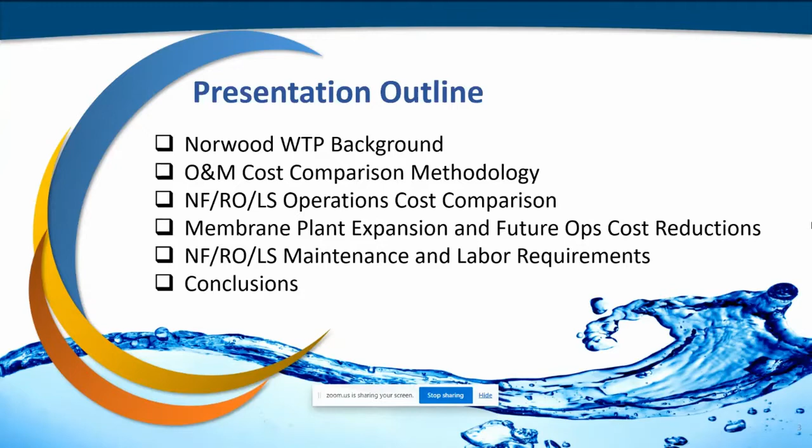Okay, so just a little bit of background on the facility. This is the Norwood Water Treatment Plant facility, located in the southeast region of Florida. It provides potable water for more than 180,000 residents.

It was originally built in 1945 with a capacity of 1.5 MGDs, and this is predominantly the lime side of the plant. Throughout the years, there's been upgrades in the lime side of the plant, as well as doing the membrane buildings, which you see over here.

The recent upgrade that we completed, I think early 2020, was the membrane buildings, both the NF and the RO. So currently the plant has a permitted capacity of 41 MGDs, and this includes the lime softening, nanofiltration, and RO, or low pressure RO.

All treatment processes can run simultaneously with various flows, including the bypass, to meet the average daily demand of 20 to 21 MGDs. So just a quick overview of the 3 treatment processes we have in the plant, which makes this plant very unique since we have all 3.

First, the lime softening system. Water is pumped from our Biscayne aquifer, and then ammonia and sodium hypochlorite is added to start the production of chloramines. It goes into our Dorr-Oliver hydrotreater - we have one that's 10 MGDs, the other one's 5 MGDs, where we raise the pH around 10.2 for softening and precipitation purposes.

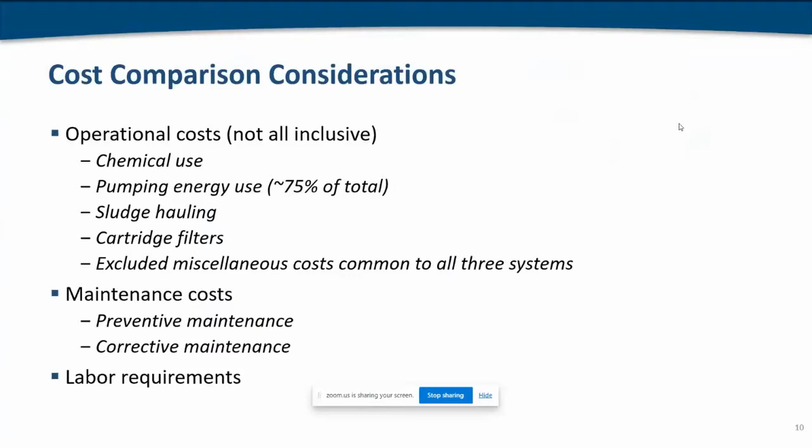So our study consisted of an 8-month evaluation where we adjusted each flow of the treatment units accordingly, and this also depended on the consumption of the permit. We had to have a minimum flow for the RO system, so minimum utilization for the RO system - we couldn't totally shut down one or the other.

So we're going to look now at the results we got, first for the chemical costs. For the monthly chemical budget, we see that our greatest cost is our lime pebble, which encompasses 37% of our total chemical budget. This is because of the large amount of lime we need to use to keep the pH above 10.2.

All of these costs have been normalized by the production flow of the corresponding treatment units. The next highest chemical was sulfuric acid, both for the membrane system, which encompasses 20% of the chemical budget, followed by sodium hydroxide and also the sludge. It's a big cost on our lime side because we're hauling off wet sludge with a lot of liquid in it, which accounts for a large chemical and disposal cost. We found there's an opportunity to optimize and maybe reduce that cost.

So purely looking at chemical costs, once again normalized by flow, we see that the RO is the cheapest treatment in chemical cost, while lime softening is the highest cost per chemical.

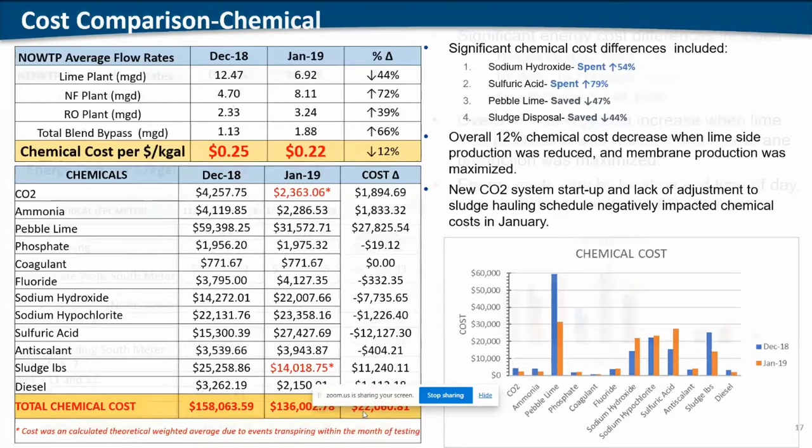So when we look at energy, once again when we adjusted the flows we did see a slight increase in energy costs. Originally it was 22 cents per 1,000 gallons. When we changed the flow, reducing lime side production and increasing membrane production, the cost of energy went up to 23 cents per 1,000 gallons. So we lost around $8,000 that month on energy.

One thing to point out is that the dollar per kilowatt wasn't consistent, it changed with the amount of energy being consumed. That's something we need to evaluate further and maybe adjust for, because it wasn't a set number, and that's just the way FP&L gave us our electricity bill.

So when we do the overall comparison, just looking at chemical and electricity costs, there wasn't that much of a significant change. We decreased by 1 cent per 1,000 gallons, going from 46 cents per 1,000 gallons to 45 cents per 1,000 gallons, so there wasn't any significant cost difference.

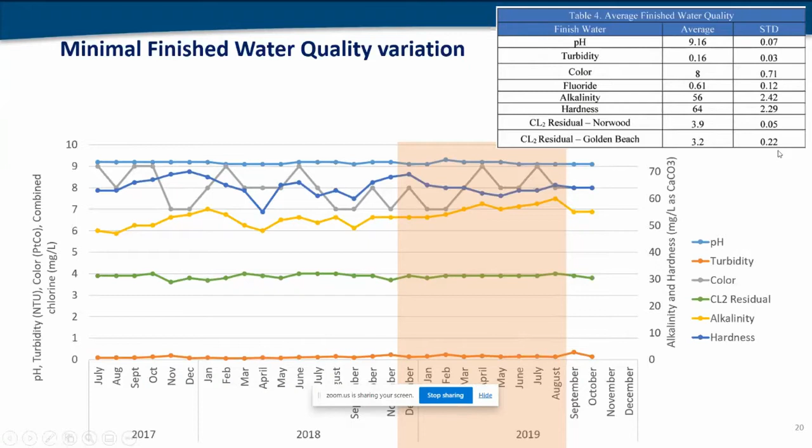Also, when we tracked our finished water, which I guess is good, we didn't see any significant change. The table shows our average water parameters for pH, turbidity, and color, and the standard deviation was within range, so there weren't any outliers.

However, when we take into account maintenance and operation staff utilization, that tells a different story, which is a little harder to quantify as well.

When we look at preventive and corrective maintenance, we know that the lime side is a lot more demanding than the membrane side. However, keep in mind the lime side is a bit older than the membrane system. Nonetheless, there's a lot of wear and tear with the lime side, just because your slakers can clog up, and even your sludge piping will eventually clog up, so you have to change the piping.

There's a lot of pumps that are failing, or a lot of maintenance that needs to be done on the pump, such as oil changes and cleaning out the tanks every 6 months. So in terms of preventative and corrective maintenance, the lime side had a lot more cost related to that.

When we look at personnel utilization, once again, the lime side is very heavy. You need a lot of people to operate the lime side compared to the membrane side. For the membrane side, both NF and RO, you can basically have 2 people - 1 operator at the main control room monitoring the SCADA and entrance of the plant, and the other person going down and taking skid parameters every 4 hours - conductivity, pH, pressure, and flow readings.

So this is for the NF side. For the NF, we upgraded all of our skids. We changed them from a 3 MGD to 3.5 MGD, as well as adding an additional new skid, as you can see here. Also, we put in a new scale inhibitor addition and new feed pumps.

For the RO, we upgraded the skids from a 2 MGD to a 3 MGD. Once again, the recovery rate also increased from 75 to 80%, as well as we upgraded our ERDs.

With these new improvements, we are expected to reduce our energy as well as chemical costs. We're looking at a pilot scale to see if we could safely reduce the sulfuric acid used in our membranes, as well as our NF. So we would like to continue this research and work to see how we can further optimize the membrane side of the plant.

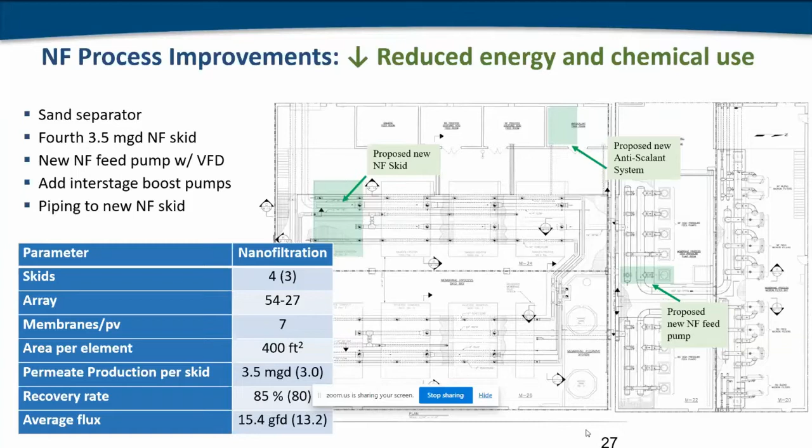So, conclusion. Overall, when we looked at both chemical and electrical costs, we saw that the NF, surprisingly - I thought it was going to be the lime side - but surprisingly, the NF is the cheapest technology right now. Close though, our lime side is pretty close by.

For the nanofiltration, we calculated it would be 40 cents per 1,000 gallons. For the lime softening, it would be 41 cents per 1,000 gallons. And for the RO, which is still costly, it would be 47 cents per 1,000 gallons. The RO is the one that has a lot of expensive energy use.

That's because of the high pressures that you have. Your wells are a lot bigger, a lot deeper. I know for your RO side, it's 200 psi compared to your NF, which is 110 psi. So you have a lot more energy being consumed.

However, like I said, your chemical cost is greatly reduced when you increase the membrane operation. And this is not taking into account the personnel and the maintenance, corrective and preventive.

So our recommendation for the plant is let's maximize the NF production to around 10.5, and continue to minimize the lime side to less than 10 MGD.

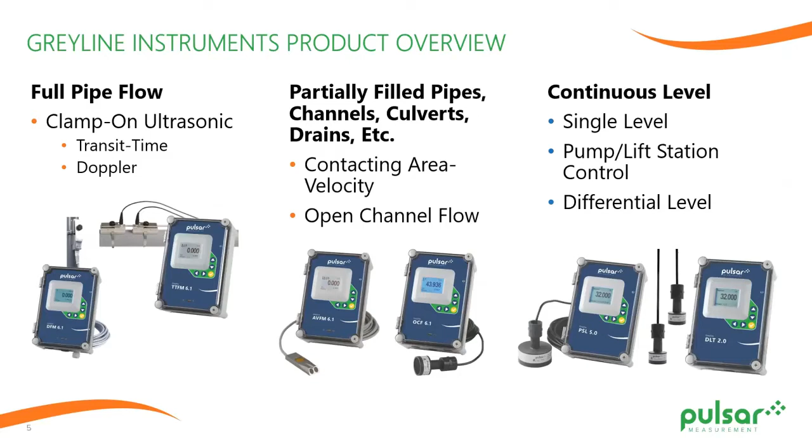Here's a general lineup of what we offer, from the legacy Greyline side of Pulsar Measurement. Today we're just going to focus on these clamp-on ultrasonics, the transit time and Doppler flow meters you see on the left.

So we're going to jump right in with our TTFM 6.1 transit time flow meter. Some of you may be familiar with transit time already from other companies, but the basic way these operate is we have 2 transducers that clamp onto the outside of the pipe. What they're doing is sending an ultrasonic signal back and forth to each other. In this diagram on the bottom right, you can see transducer A is sending a signal across the diameter of the pipe, bouncing off the pipe wall, and transducer B is measuring or receiving that transmission. Then transducer B does the same thing in the opposite direction.

If that pipe is completely full and there's no flow in it, those signals take the same amount of time either direction to arrive at the opposite transducer. But as soon as we introduce flow into the system, the signal moving with the flow arrives faster than the signal going against the flow. So this unit is measuring the difference in that transit time, and that transit time difference is directly proportional to the fluid velocity. That's the basic background of how we're making this measurement with the TTFM 6.1.

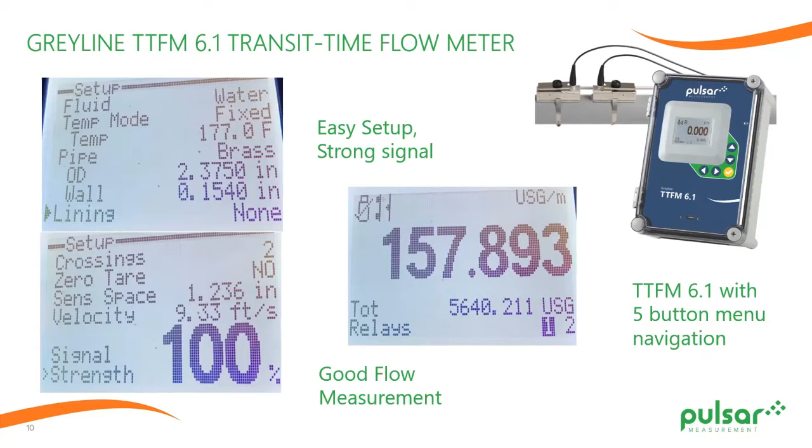I mentioned that we have a wide range of pipe diameters, and we accomplish that by using different transducers. Our TTFM 6.1 traditionally only had these standard B sensors, seen in the upper right-hand corner, spec'd for 2 inches up to 48 inches. We'll see in the next slide that we expanded our transducer offering because of different mounting methods we have.

One area we were missing was pipes under 2 inches. So last year we released our small pipe, or A sensors, capable of measuring on pipes from 1/2 inch to 4 inch diameter. We typically recommend them for 1/2 inch to 1.5 inch pipe diameters. Just recently, at the beginning of this year, we released our large pipe, or C transducers, good for 12 inches up to 48 inches.

You may be wondering, we already have B sensors good up to 48 inches - why do we have another set of sensors also good up to 48 inches? I'll get into that in the next slide.

We have a few different transducer configurations. The default mounting method is this V mounting, or 2-cross. This is what you've seen depicted in all the TTFM 6.1 pictures so far, where both transducers are on the same side of the pipe. The signal goes across the diameter of the pipe, bounces off the pipe wall, and then reflects up to the other transducer.

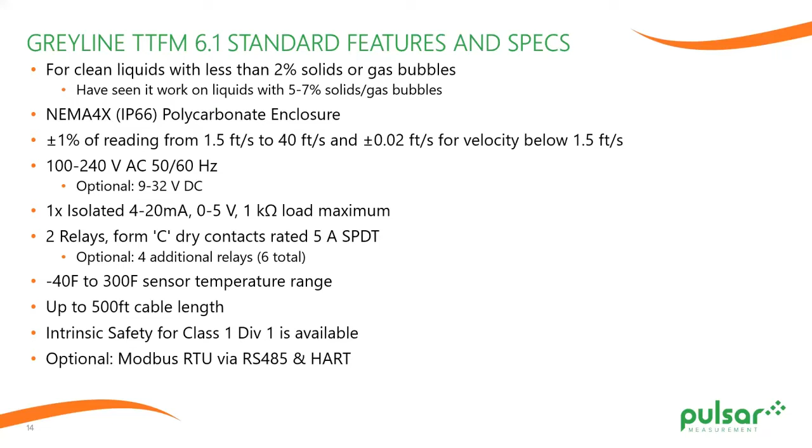Standard power is 100 to 240 volt AC. You can get it optionally as 9 to 32 volt DC if you have a remote application and want to hook up a battery and solar panel system. It has a standard 4 to 20 output, which can be converted to 0 to 5 volt output. It has 2 control relays, which can be programmed for high flow or low flow alarms, or pulse output, and we can also add an additional 4 relays to give you 6 total. We can run up to 500 feet of cable length between the transducers and the display. We have class 1 div 1 intrinsic safety available, and we also have Modbus and HART available for serial communications.

Just to show you a little bit of difference between the portable PTFM 1.0 and the TTFM 6.1: the portable unit has a built-in rechargeable battery. It can operate continuously when plugged into a charger. The data logger is only 300,000 points on the portable. It's only compatible with the B sensors right now, which are 2 inches to 48 inches. You don't have any control relays, but you do have a 4 to 20 milliamp output on the portable.

We are in the process of updating the portable to the 6.1 generation, and we're actually looking to release that new portable in April. So it'll become the PTFM 6.1. What you'll see is it'll be compatible with the A, B, and C transducers. It's going to get a larger data logger. Right now our portable unit, the handheld portion, does not have any IP rating on it, but we're going to go to, I believe, either IP66 or IP67 on the control unit on the handheld portion with the 6.1 generation. So it's going to be a more robust unit and have more of the features of the TTFM.

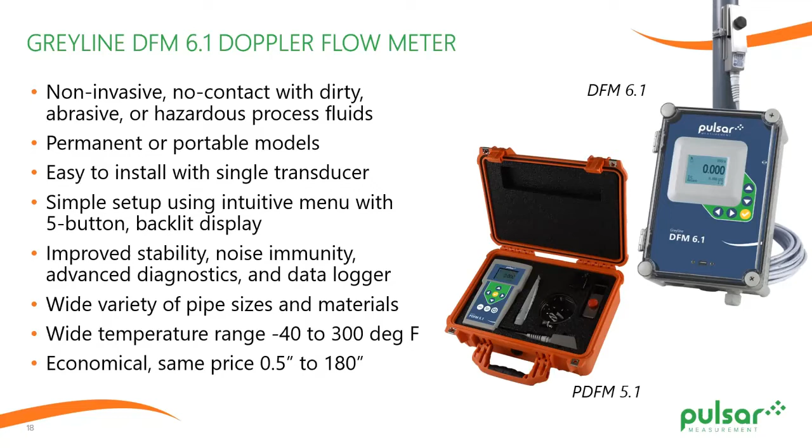Standard features and specs look pretty similar to the transit time, it's just the percent solids range. Remember, with the TTFM, we're spec'd at 2% solids or less. For the Doppler, we're spec'd at 2% solids or more.

There is overlap between the two units. I've seen the transit time work on fluids up to 5 to 7% solids, so there are areas and applications where you can get both the DFM and TTFM to work. Sometimes it's just a matter of testing the unit out at the application to see how it performs.

But for the most part, you're looking at dirty fluids with suspended solids, aeration, sludges, slurries for the Doppler. This is a plus or minus 2% of reading unit, as opposed to the transit time, which is plus or minus 1%. But you still get the 4 to 20 output, 2 relays, optional additional 4, 500-foot cable length, class 1 div 1.

And optional Modbus or HART serial communications. Again, with the portable, you get the same battery life as the portable transit time unit, but it uses that single transducer for 1/2 inch to 180 inch, same data logger and no relay, but you do get a 4 to 20 there.

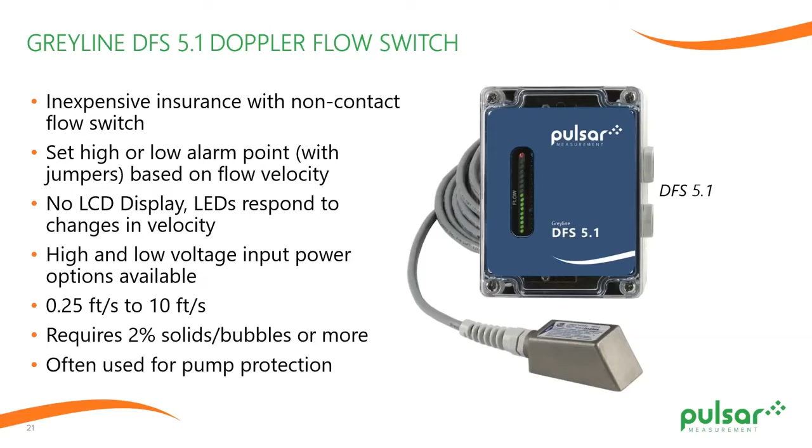Once the flow gets above or below that set point for however long your delay is set for, there's a simple control relay that sends a signal out. So you can either use that as an alarm to a SCADA system, or use it to cut the power to a pump so you don't run it dry, whatever. For under $1,000, you have a very reliable pump protection unit with our Doppler flow switch.

Just to touch on some typical applications for these units: with the transit time, we're typically looking at raw water - lake, stream, river, etc. - cooling water, chemicals, low conductivity water, water and glycol solutions, diesel and fuel oils, treated water, and domestic water. For DFM, we're looking at raw sewage, combined sewers, municipal influent, viscous fluids, return activated sludge, slurries, pulp stock. So you can see the different territories they cover, but again there can be some overlap between the two depending on the application.

And just to bring it home, like I said, I like to start and end with this slide. We really push Pulsar measurement because we're easy to install, set up, and use. We have reliable performance from design to manufacturing and operation at the site, management of information with our standard data logger and free software. We're economical, both the transit time and Doppler - it doesn't matter if you're measuring a 1/2 inch diameter pipe or a 48 inch diameter pipe, there's virtually no difference in the price of the unit.

That's a great way to compete against inline mag meters or insertion mag meters or anything like that. We get that economy, especially when we get into larger diameter pipes. We're very responsive, whether it's coming from us at Pulsar Measurement or our rep partner, Jack Tyler. We typically get everything shipped out in 3 to 5 business days, and again our standard 2-year warranty on all of our products.

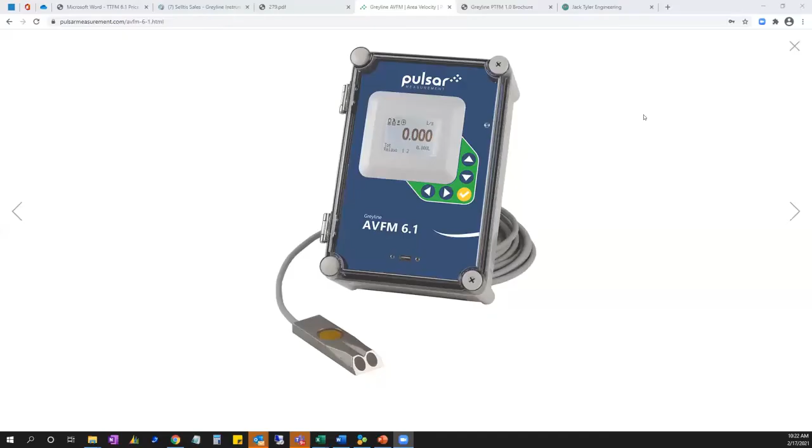All right, can you guys see that now? I cannot see it. Oh, sorry, I guess I'm not sure. Share. There, how's that? So can you guys see that now?

Yeah, okay. So this is our AVFM 6.1. This uses this submersible transducer here. You can see there's a crystal in the top of the unit and 2 crystals in the front. The one on the top is going to measure the level of the fluid, and the one in the front is going to measure the velocity of the fluid.

So like I said, this is used for partially full pipes, open channels. You can use it in the effluent leaving a wastewater treatment plant. You can use it for water coming in through the sewer lines into lift stations. So we're measuring the level of the fluid and the velocity of the fluid in the unit itself. You're just programming in what the channel dimension is, whether you're using a circular pipe, a rectangular channel, or trapezoidal.

We do have the ability to build custom channels inside the unit, and it uses that information along with the measured velocity and level to give you a volumetric flow rate without having to have a flume or a weir.

This is the permanent version, so a wall-mounted unit. We do have a portable unit of this, it's called the Manta Ray, and it looks kind of similar to the PDFM and PTFM, where it's in that nice orange Pelican case, but it's actually a unit that's built into the Pelican case. It has all the same features as the AVFM, just built into a waterproof case with a rechargeable battery, but uses the same transducer.

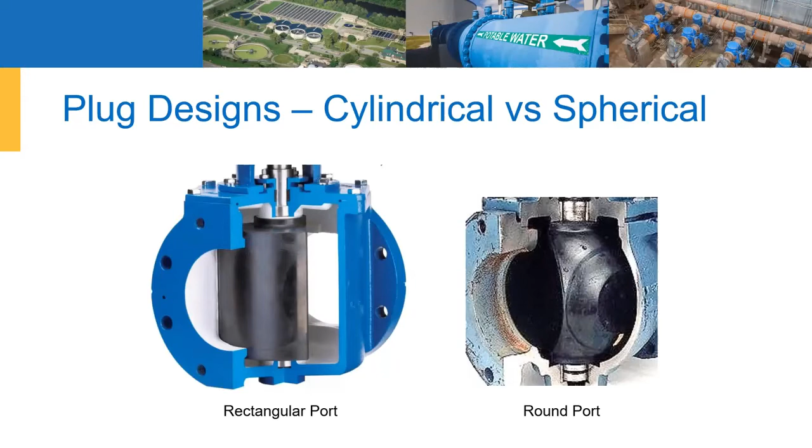Port area options. So for decades, standard port existed. When Matt DeZurik invented the eccentric plug valve, he needed it to fit in the same space as a gate valve. And so he found out that he could get everything he wanted accomplished and fit in the same space if the port was 80% of full pipe. Remember, they didn't have high flow velocities, a lot of abrasives, a lot of solids. Energy costs weren't so important. So that is what he came out with, and that's still the most popular port design. It's 80% or more for 20-inch and smaller valves, and 70% or more for larger sizes. And that's anybody who makes a rectangular ported valve. Those are the dimensions that we follow for standard port.

It is the original do-everything valve. It just simply shuts off every time with clean or dirty media. And incidentally, rectangular ported plug valves are great for control, if you wanted to control flow or pressures and so forth.

100% port valves actually are designed to fit in the same space and have the same features as the standard port valve, but the port area is a full area as much as the pipe. So think of more energy efficiency. They're great for handling solids and especially abrasives, which can be an issue when you're dealing with grit and so forth, so 100% port's a good choice there. And just one note, by the way, round port eccentric plug valves are not available in 100% port area.

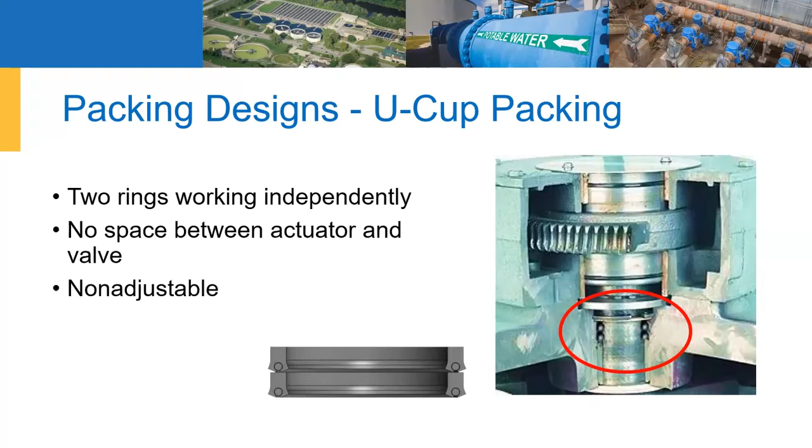So in regard to typical applications, just some things to consider. Many owners standardize on one type of valve for everything. Others will pick the valve according to the application. If there are concerns with abrasive media, such as grit or sand, 100% port is ideal because the fluid velocity doesn't increase as it passes through the valve. It minimizes the sandblasting effect that can happen at high velocities.

Likewise, energy costs are important for pumping. 100% port has less head loss and also keeps the flow straight as it enters the pump on the suction side. For flow or pressure control, a standard port is the best choice. As a matter of fact, rectangular ported eccentric plug valves are among the best performing control valves available for wastewater. They handle a broad range of flows and are very resistant to causing cavitation.

Digester gas is a special application. Hydrogen sulfide and methane in that gas can pose problems. Hydrogen sulfide can be very corrosive. Proper selection of materials is important. Aluminum is chemically inert to hydrogen sulfide and is a popular choice for valve material for digester gas. Another option is to use a stainless steel plug in the iron body that the valve normally has. The stainless steel plug will eventually get rough over time, but it does last a long time and it's a good material.

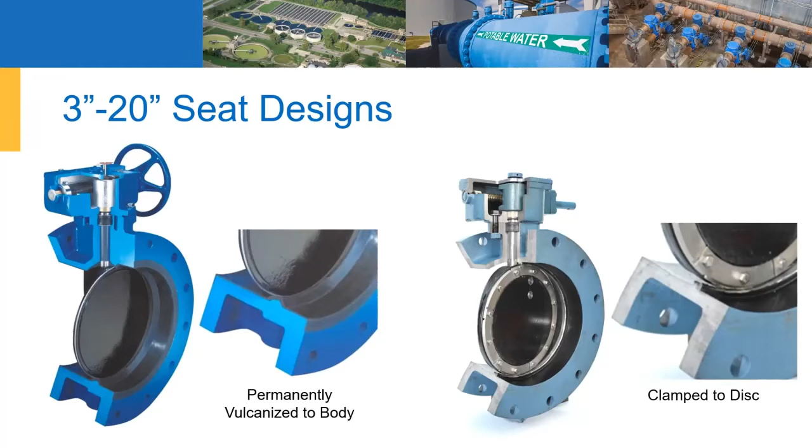The other thing I want to point out is seat location, and that varies among brands. It's most popular to have the seat in the valve body. It's generally believed that the seat has more protection from the high velocity flows, and no matter how clean we think our water is, there still may be sand or whatever particles or construction material in the line that could flow through the pipe. And if the seat is on the disc edge, which is in the middle of the flow, it may be more vulnerable to damage. So that's two different philosophies from various manufacturers.

Now there's more to talk about on the larger diameter valves, 24 inch and larger - most people start at 24 inch. The first method to put a seat in a larger valve is to clamp it in place, either in the body or the disc. I explained a minute ago about the differences between seat in body or seat in disc. Those seats are adjustable only if the flat side of the disc is on the downstream side of the valve. That's because the valve must be closed with pressure on the opposite side of the disc, so the leak can be seen.

You have to be inside the pipeline to see it, and the proper screws are tightened. The second method is to lock the seat in the valve body. I should mention all of these are mechanical - nothing is glued in place or anything like that, even though we use the word epoxy. The seat is locked in the valve body. There's a dovetail shaped groove in the body, and then the rubber is put in, and a filler of hard epoxy is added behind the rubber, and that locks it in place.

An advantage to this design is it's adjustable from either side of the disc. What that means is you can install the valve in the preferred position - in other words, the flat side of the disc can be upstream. One thing to bear in mind is that when the valve is installed in the preferred position with the flat side upstream, the operating torques during operation are substantially lower, significantly lower on big valves. That puts less strain on the actuator, less strain on the valve shaft and connecting parts. So especially on larger diameter valves and especially with higher flow rate velocities, that's important to consider.

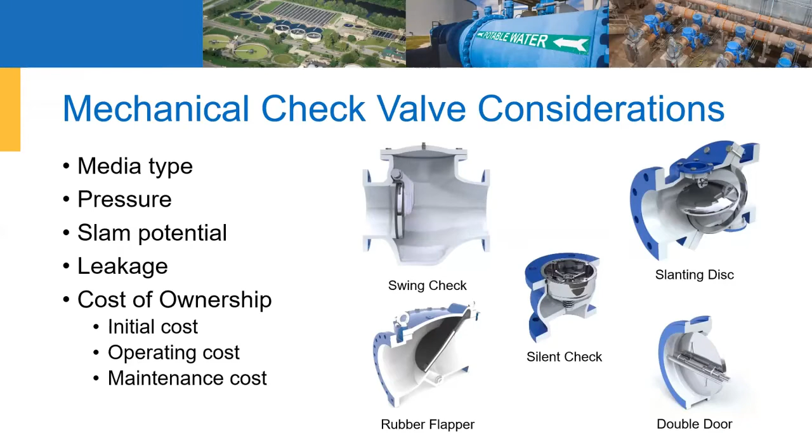Like so many valves, there's often more than one that'll work. We have to consider what is being pumped through the valve - is it dirty water, clean water, air, abrasives, slurries? Are there application conditions that could cause the valve to slam? The amount of leakage allowed will affect which type of seat is required, and of course which valve has those seats. Purchase price isn't the only consideration, but also energy efficiency, and of course, how long will they last in the application?

So a couple of things to consider - one is what's the media. If it's dirty, what type of valves would be good? Well, two popular types, especially the swing check valve, are the swing check valve or a rubber flapper. Both of them, the disc or the flapper, move out of the way when there's flow, and they also cause minimal disturbance in the flow. They'll move out of the way, so lumpy or stringy things won't get caught in the valve that would prevent them from closing.

On the other hand, there are different valves for clean media. Generally speaking, all check valves, even the ones on the previous page, are suitable for clean media applications. However, some valves can only be used with clean media. Those all have something in common - there's part of the valve in the middle of the flow stream that could cause them to foul up on dirty media. The slanting disc check valve, upper right, is the most energy efficient check valve out there. It's used a lot on high service pumps. They have the least amount of flow disturbance and head loss, but the disc is in the middle of the flow path. For the same reason you wouldn't put a butterfly valve in the middle in sewage, you wouldn't put a slanting disc check valve in sewage.

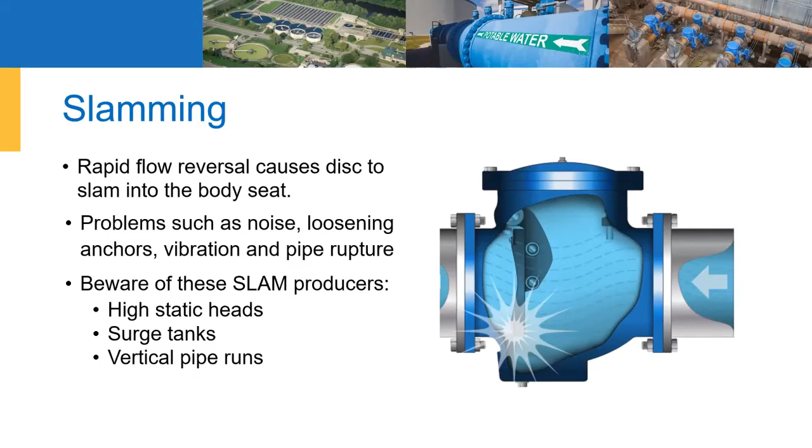So how do you reduce slamming? Well, most of the time it's using a lever and weight check valve, and the weight can be adjusted. Adjusting the weight is often the right solution - moving the weight outward makes the valve close faster. You want to try to prevent slamming by getting the valve closed before flow reverses.

However, adjusting that weight, there is a trade-off. If the valve closes too fast, it can hit the seat hard, which causes seat problems and can even make the weight levers break. That's why air cylinders are a common option. They provide a soft landing when the valve closes.

As the valve opens, air enters the cylinder. When it closes, the air compresses and is bled off slowly. That pillow of air is intended to take away the hard landing of the disc.

Best comparison is to think of a door closer on a screen door that keeps mosquitoes out of your house. Without it, the door slams shut. With it, the door travels mostly closed quickly, then the door closer eases it into the jamb. However, if something were to push hard on that door, the closer isn't strong enough and the door could still slam. Likewise, air cushions do not prevent slamming, but only help valves close quietly.

Adjusting the weight is what prevents slamming. And if you can't get the weight adjusted sufficiently because it's a high slam application, then we have another solution, which is the bottom buffer. It's an oil-filled cylinder that controls the last 10% of travel.

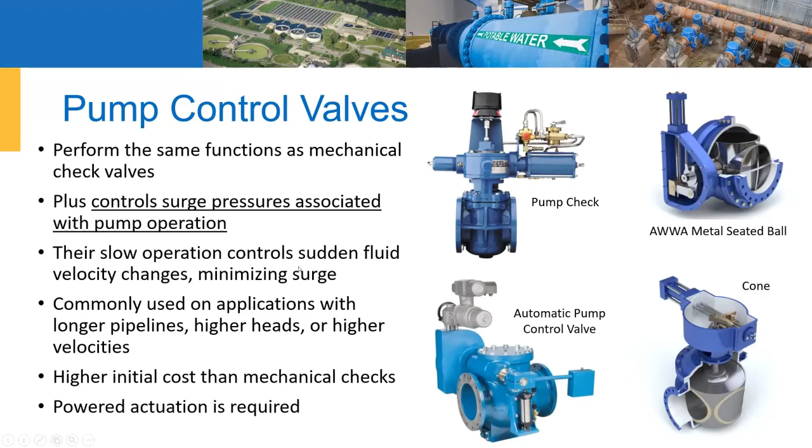Surge relief valves may be necessary to protect the system from overpressure during power failure or other unforeseen events. In other words, even after you've thought of everything and planned for surges, some unplanned event can start a surge.

That's why every system that is capable of generating an unacceptable surge pressure should have one surge relief valve. The way they work is they have a disc that holds the valve closed with an adjustable spring. When the pressure in the line exceeds normal pressure by 10 to 15%, the valve opens and dumps pressure, so to speak, back to the wet well usually. Usually only one surge relief valve is needed to protect the pipeline equipment, even when there are multiple pumps.

And with pump control and surge protection, consult your valve manufacturer for guidance. We're interested in protecting the pipelines, not just the pump.

So my whirlwind tour is nearly done. There are many types of valves, and I didn't mention all of them. Some we make and some we don't. Air release and air vac valves are essential for any piping system. Sometimes knife gates are used because they're compact in space. They're tall, but they're compact in terms of lay length.

Three- and four-way valves control direction of flow, divert flows, and so on. Control valves for pressure, temperature, flow rate, tank elevation, whatever - control valves. And sluice and slide gate valves are another type of valve you see in your applications.

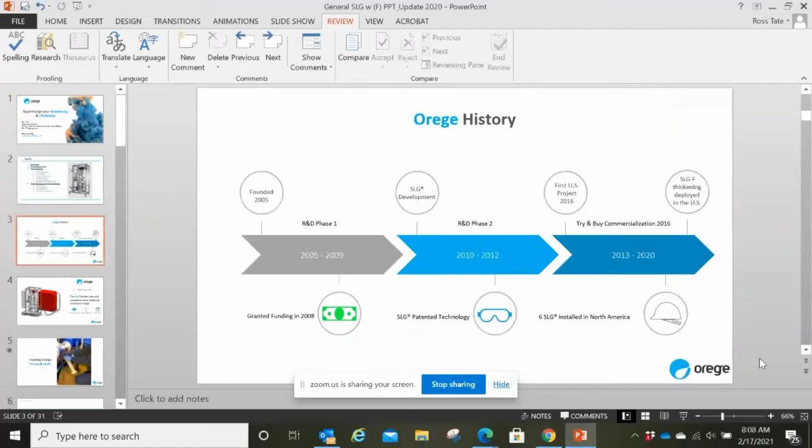Are you on the Orege history? No, we can see the generic PowerPoint that has all your slides to the left. Oh okay, I was in presentation mode, let me try again here. Is that better now, or is it the same? I wonder if the screen you need to share, now that you have it in presentation mode, if you have to select the screen that's actually presenting. That might be it, let me go here. I'll just share my entire screen. Let's see if this works. And there you go, is that better now? We're full screen, there we go. Yep, that should work for us. Thanks, perfect, no thank you.

So I'll continue here. We did enter the US market in 2016, and then since entering the US, we have 6 full-time installations, and then 3 others that we're currently working on, finalizing some phase of optimization or installation. We did enter the US for thickening in 2019, introducing the SLGF thickening in the US market.

So this is the video of the end product, what we call our air and sludge emulsion. This is actually what's coming out of our system. What you're going to see is sludge that has been processed through the SLG and then injected with polymer. Let me know if there's any issues with the video.

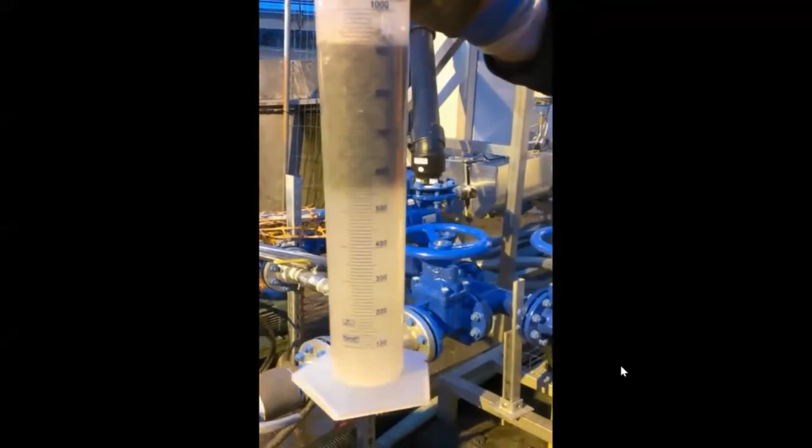So he's going to pull a sample here. Again, this is just after polymer injection, and this is what comes out of the SLG. This is what would be sent to your gravity belt thickener or your belt filter press. You can see the sludge separating, getting two distinct layers of sludge and water. Even the smaller particles start to move up into that sludge layer, and it continues to compact.

This effect would actually happen without polymer if we were to just take a sample after the SLG, but because it would take too long, we still have to utilize polymer before going to either belt filter press, gravity belt thickener, or volute style screw press. We still have to use polymer, so we utilize it just after, in between the sludge pump. Here we go: sludge pump, SLG, polymer injection, and then to dewatering.

This is the interaction between the air and the sludge. This is where the air meets the sludge and breaks up that sludge as much as possible. What we're trying to accomplish with the air is break up those microcolonies as much as possible, to release that bound water. This is the beginning of creating that air and sludge emulsion that you saw in the last video. So this is where it all starts, in the injectors.

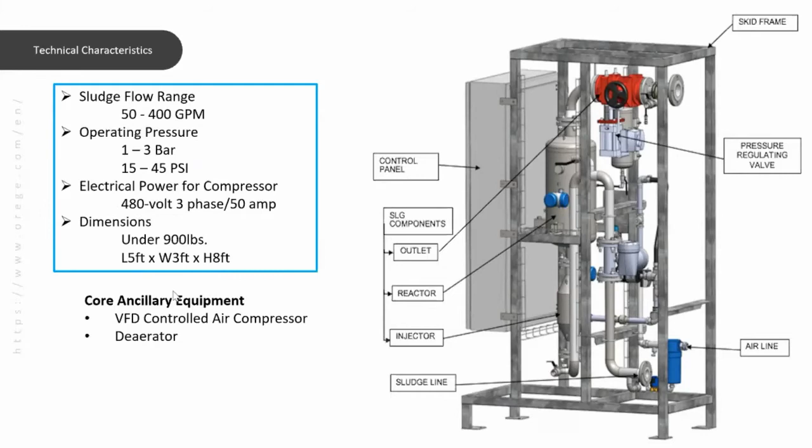So what we're trying to do is actually break that down. Any of that EPS, that extracellular polymeric substance, those aggregates that are binding these cells together, we're going to try to break those up, because there is trapped water within there, bound water. So we want to break that up, and we're going to free that bound water, but we're also going to have a secondary application to that.

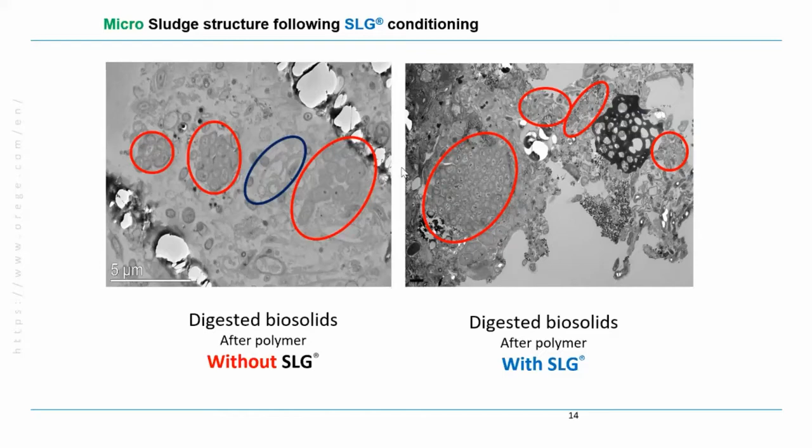When that goes onto the belt filter press, that gravity zone, visually, this will be what you see. This is what we call our macro effect, because it's what you visually can see at the plant after the process. Instead of the water carrying over on top of the sludge, what you'll see is actually that the water is able to drain through these channels or pores, making it more efficient within that gravity zone.

So you're actually sending less water into the pressing zones, but then being able to press at those higher pressures. Those two advantages combined are what gets us to our effect of increasing your overall performance of your dewatering or thickening.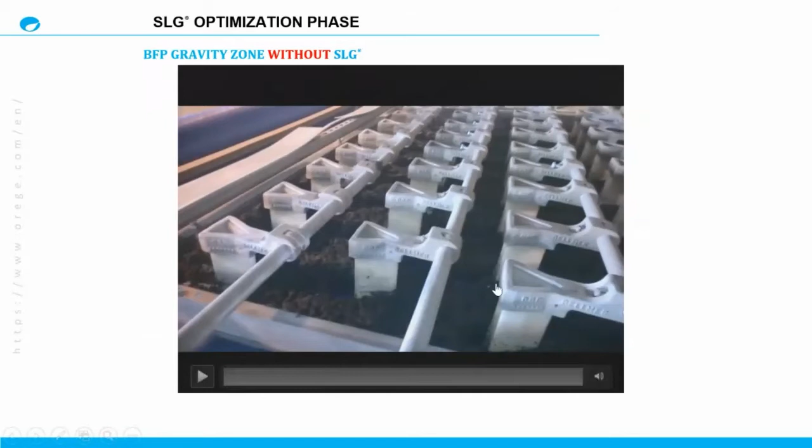This is going to be with the SLG. So again, just notice when rows start to form, you can see a distinct difference in the characteristics of the sludge. And then almost immediately, we're starting to see rows form.

The amount of water draining off in this area is much higher than on the other press, and then going into the pressing zones. I will mention that we were using about 20% less polymer on this application, and we're at a flow rate of 10 gallons per minute higher than what the client was running at. So we were able to hit on all 3 of those.

We increased their cake solids by 3 points, decreased their polymer by 20%, and then we're able to increase their flow rate by 10 gallons per minute. So very good installation for us, our first in the US.

So the video that you just saw was Allentown. This is an anaerobically digested sludge. Again, we took them from 15.3 to 17.5. This is the current numbers that we're working on for our second installation, actually.

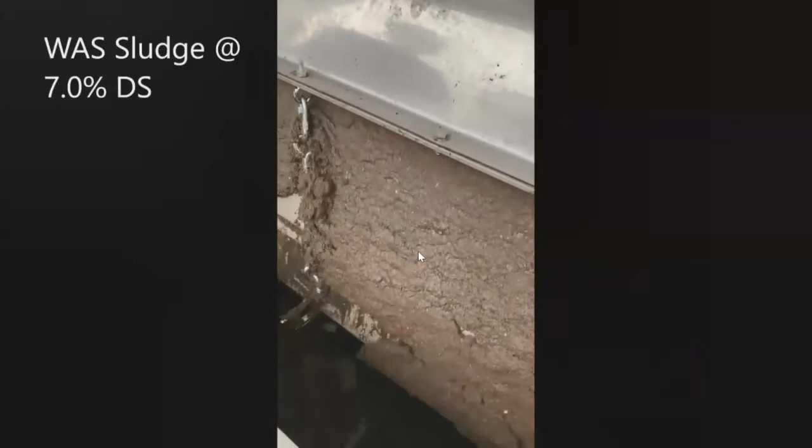So what you'll see here are some of the demonstrations that we've done in the US. This is a waste activated sludge, so all secondary. This is the floc tank, so this is after the SLG. Let's show the filtrate. So that flow is going over the top of that drum and then being knifed off on the other side. That is a pressure plate on top where we can increase the pressure.

This was the first time we processed anaerobically digested sludge on the thickening system.

So again, not your traditional rotary drum that you see in municipal applications - most municipal applications are a little bit different of a system. It has been more used in industrial, mainly agriculture, but we found that because we get that float, that separation, that air and sludge emulsion, actually really pairs well with the Flo-Sep technology, and we get really good results within this system - a very compact, robust kind of system, similar to the SLG.

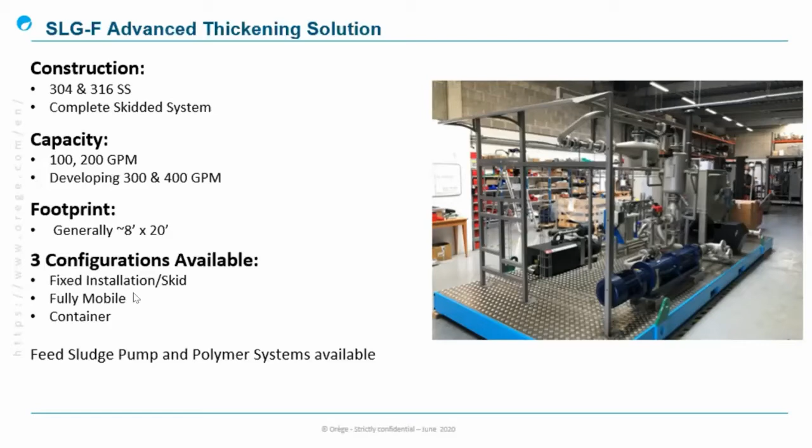So this is a picture of the Flo-Sep system, again, fully enclosed. All of our systems come fully enclosed, all of our Flo-Seps.

We use essentially a 1/2 and 1 horsepower motor, depending on the size, but for the 100 and 200 gallon per minute units, it's a 1/2 horsepower motor, 2 bearings on each side, so maintenance is very low. The wedge wire screen comes anywhere from 500 to 1,000 microns, and we can do some testing to identify which size screen is going to be the best fit for your application.

We also utilize Seepex or Netzsch sludge pumps on this system, and we can provide a fully enclosed thickening system, so everything you need: sludge pumps, polymer, air compressor, or we can just provide the SLG and the Flo-Sep. So we have a full range of products we can provide for these applications.

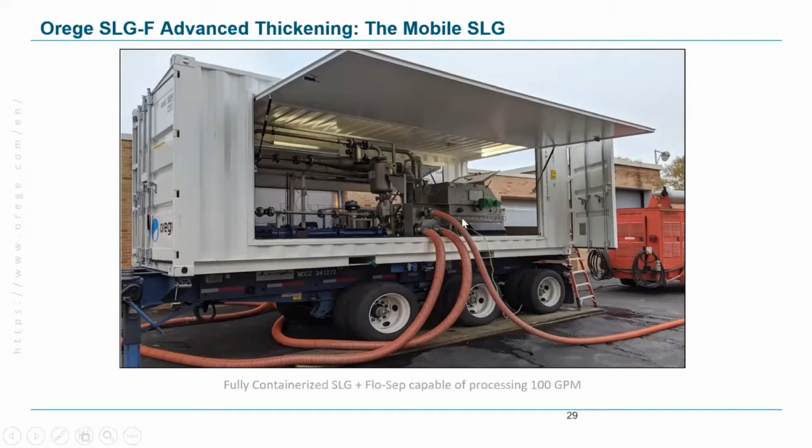This is fully containerized, so it includes everything you need. Again, we have both feed and discharge pumps and a polymer system included. So when we do come on site, we can utilize the client's polymer and our own polymer system, or we can utilize the client's polymer system entirely. Either one works for us, but it's very easy to hook up.

We have 3 connections here: your feed, your filtrate, and then your discharge line coming off. Again, very easy, this is ready to go. This unit is actually located currently in Covington, Georgia, that's where our US headquarters is, and it's ready to go.

This demonstration unit has been used to run waste activated and primary blends, as well as anaerobically digested sludges so far. It can handle up to 100 gallons per minute.

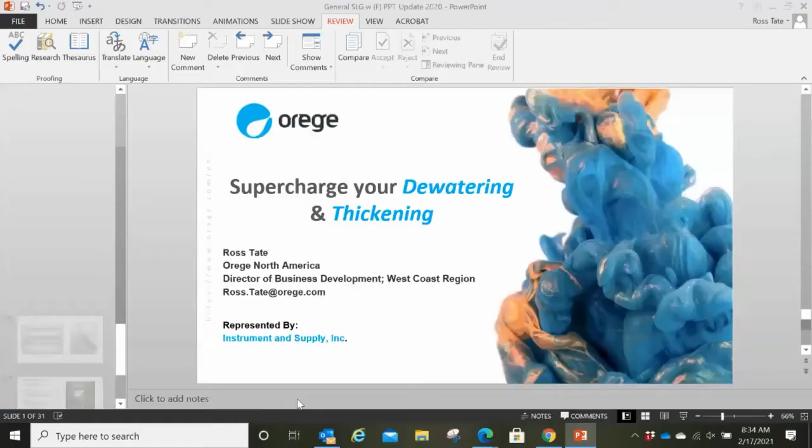Thanks, Ross. Anybody else have any questions? Okay, and you said your local rep is Instrument and Supply? Correct, yes, Chris. Okay, cool. All right, well, thank you, everyone. Appreciate it. I'll stop.

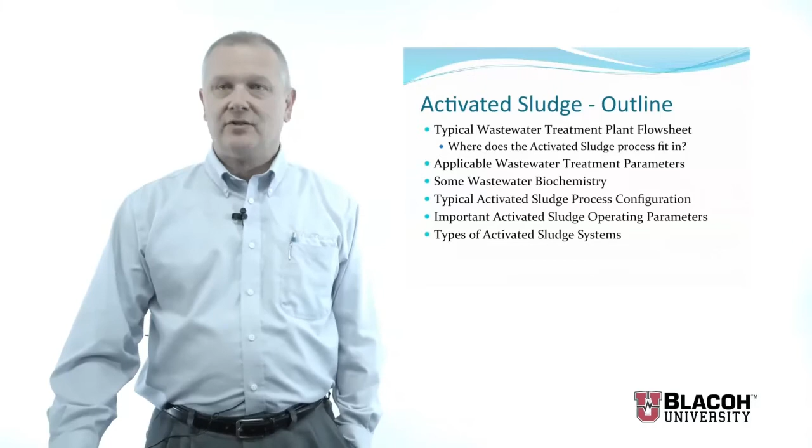As concrete wears, you get sand particles, fine grit that moves down the pipe and into the treatment plant. That grit is a problem. If you run grit through a pump, you'll wear the pump out very quickly, and there are a lot of pumps in a treatment plant. That grit can also settle in places where you don't want it to and cause problems. So we take the grit out up front with some simple tanks and mechanisms that remove it.

Following that is what we call primary treatment, or a primary clarifier. Not all treatment plants have primary clarifiers, but any treatment plant bigger than about 5 million gallons a day typically has one. It's a large basin that the liquid flows into, and any solid material in that waste stream will settle to the bottom of the tank where it can be collected and removed. The clear, relatively clear liquid then flows on into the rest of the plant.

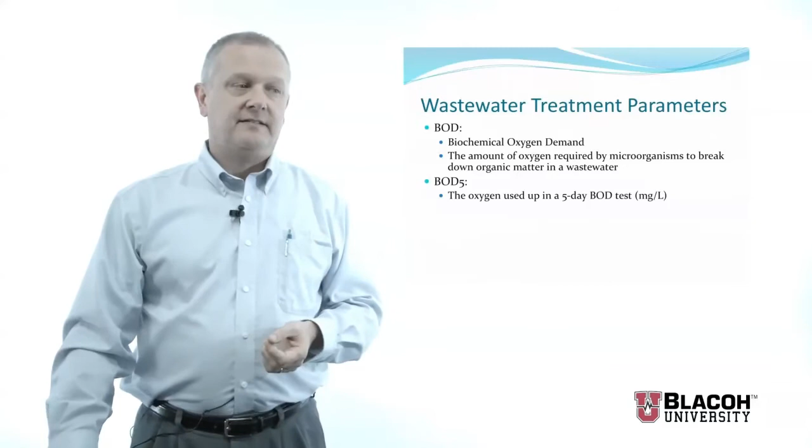The actual test we use is called a BOD5 test. The way it's performed is we take a bottle with water that has been aerated, and we measure the oxygen concentration in that water. We add our wastewater sample and a seed of microorganisms that will break down that waste. We seal it tightly and put it in a cabinet at 20 degrees centigrade for 5 days. We pull it out, measure the dissolved oxygen concentration, and know how much oxygen was used up. That becomes a measure of the biodegradable organic material that was in that wastewater sample.

Typical influent BOD, that is the BOD measured on the influent to a treatment plant, is typically around 200 milligrams per liter, anywhere between 100 to 350, depending on the type of community and whether there are industries contributing or not. That's a very typical kind of number, okay?

The U.S. National Minimum Effluent Standard on the far end of the treatment plant says that a treatment plant cannot put water into a receiving body that is more than 30 milligrams per liter of BOD on a 30-day average, 45 for a 7-day average. Now that's the U.S. national minimum, part of the Clean Water Act of 1972. But there are many state and local standards that are considerably tighter than that.

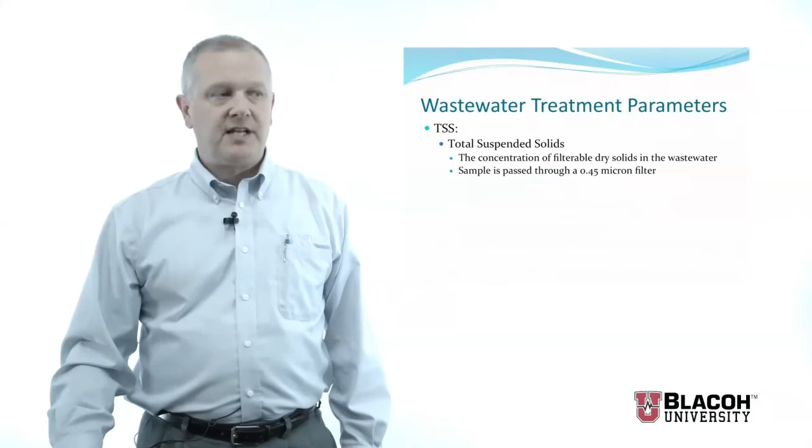Let's move on to TSS, or total suspended solids. This is a measure of the particulate matter in the wastewater. What we do is run the wastewater sample through a 0.45 micron filter in a standard procedure, and whatever stays on the filter paper is considered suspended solids. Obviously there's some very refined solids that do go through, but we consider those dissolved because they're so small that essentially they are.

You dry the solids on that filter paper, weigh it, and now you have the suspended solids concentration for that wastewater. Again, the typical influent coming into a sewer treatment plant in the United States is somewhere around 200 milligrams per liter, with a range depending on the type of community and the industries in it. Again, the U.S. national minimum standard is 30 milligrams per liter of suspended solids going out of the treatment plant on a 30-day average, or 45 milligrams per liter on a 7-day average. And again, much tighter in certain areas of the country, depending on the water body it's going into.

Typical TSS coming out of a treatment plant using an activated sludge process is in the single digits. So again, it's very effective in removing the particulate matter from the waste stream.

Okay, let's look very briefly at some biochemistry. This isn't very technical, but basically we want to talk about what goes on, what the microorganisms do as they remove this BOD, or this organic matter, from the wastewater.

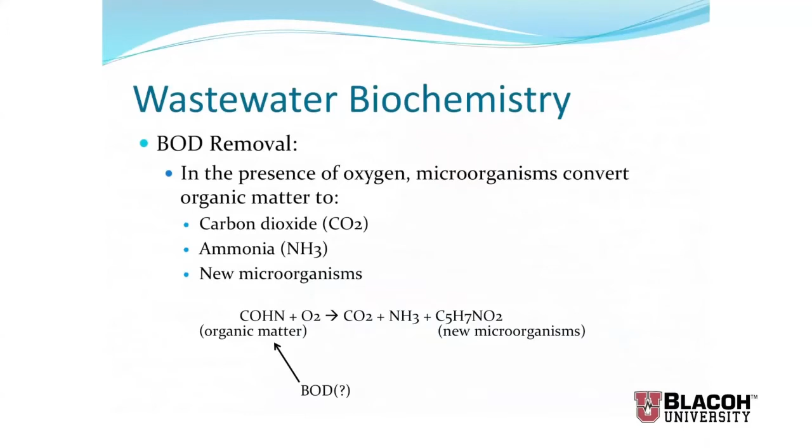You could also say it is the oxygen being consumed by that process. In the wastewater industry, the terms are kind of used synonymously, and we often talk about removing BOD as if BOD were a substance. It's really a surrogate for all of this organic matter—the urine, the feces, the food products ground up in your disposal, and everything else that ends up in the sewer that's organic in nature and can be degraded by these microorganisms. So when we talk about removing BOD, or how much BOD is in the wastewater, professionals are really meaning how much organic material is there that we need to get rid of, okay?

Now, in an aeration basin, we logically have some kind of aeration system. We either have diffusers on the floor that bubble air up through the liquid, or some kind of mechanical device that stirs and churns up the liquid and gets oxygen and air to dissolve in the water so that there's plenty of oxygen for the microorganisms to do their job.

From that point, the liquid goes into the settling basin or clarifier, and the microorganisms settle to the floor of the clarifier. The liquid that comes out the top is typically single digit in BOD and suspended solids. So the clear liquid flows out the top, but we take the solids that settle in the bottom of that clarifier and we recycle them.

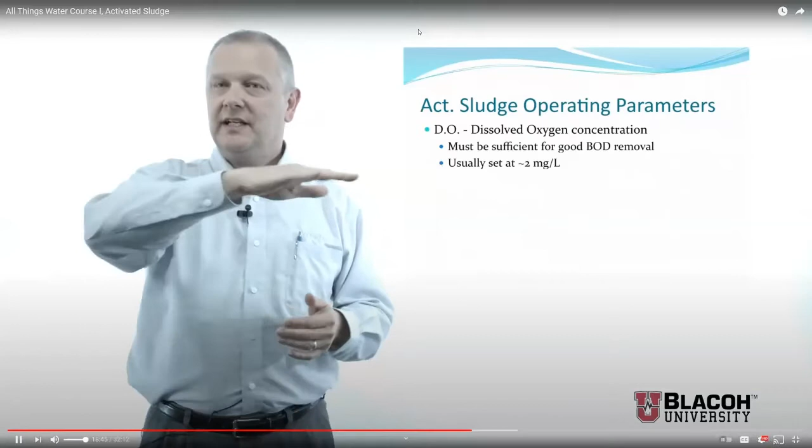Usually we set it at about 2 milligrams per liter. So we have an oxygen sensor in the aeration basin at all times, and we keep the level in that basin at about 2 milligrams per liter. So there's a little bit of excess oxygen that's always there for the microorganisms to do their work.

If you set it too high, there's a couple problems. First of all, it wastes energy. You're spending a lot of energy churning up the liquid or blowing air into the liquid, and that's a very expensive part of the waste treatment process, is this aeration. And so you don't want to set it too high.

On the other hand, if it's too high, you create an environment that favors a certain type of bacteria that we call filamentous bacteria. Most of the bacteria that do this BOD removal for us are small, round, or oval-shaped bacteria, like you see in your lab microscope if you've taken any biology classes. But there are other types of bacteria that are filamentous.

They look like tree branches or feathers with long filaments. They like environments with a lot of oxygen, and so we'll grow more of those if we have too much oxygen in the system. They don't settle well in the clarifier - it's like dropping a feather, it doesn't drop nearly as fast as a rock. Very similar analogy. So we don't want the oxygen too high in the system.

On the other hand, we don't want it too low either. If it's too low, you're not going to get the BOD removal you need, because the bugs, we call them bugs, the microorganisms, can't remove the organic material. And if it gets really low, it will go anaerobic, which to most of us means it's smelly. It's gone rotten and it stinks. You're going to get hydrogen sulfide and other gases that the neighbors around the treatment plant are not going to appreciate.

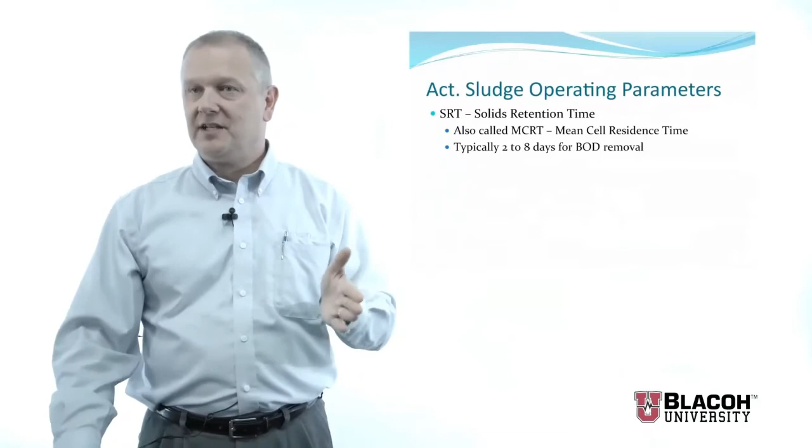Typically it's 2 to 8 days for simple BOD removal. If we get into nutrient removal processes, which is another class we'll talk about, it's even longer. But for typical BOD removal, most wastewater plants, this solids retention time is between 2 and 8 days. And it needs to be long enough that we allow the organisms to reproduce and grow. If our SRT is shorter than the reproductive cycle of the microorganisms, they'll be out of the system before they reproduce, and we can't get the concentration we need to do the job. So this is a very important parameter that we have to design for.

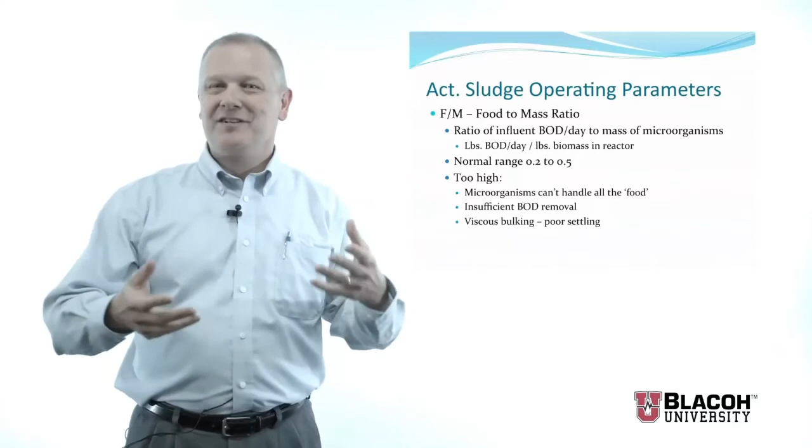You also get what we call viscous bulking, which I liken to fat bugs. These microorganisms have eaten too much, and it actually changes their specific gravity. They don't really get fat, but it's analogous to that, and they don't settle well in the clarifier. They'll even float sometimes, and that doesn't work because you take the clear liquid off the top of the clarifier.

But if the food to mass ratio is too low, you have problems with filamentous organisms that are more efficient at getting what little food is there, so they tend to predominate, and again you have poor settling in the clarifier. So you have to keep that food to mass ratio in a fairly stable range for this system to work properly.

Let's look at different types of activated sludge systems from a practical standpoint, actually in plant designs.

Or fine bubbles, which do a much better job of dissolving oxygen into the liquid but don't mix quite as well. There are many variations in shapes, sizes, and designs that people have come up with, but basically they all just bubble air into the water. You need a blower or a compressor to push that air through the pipes and through these diffusers into the wastewater.

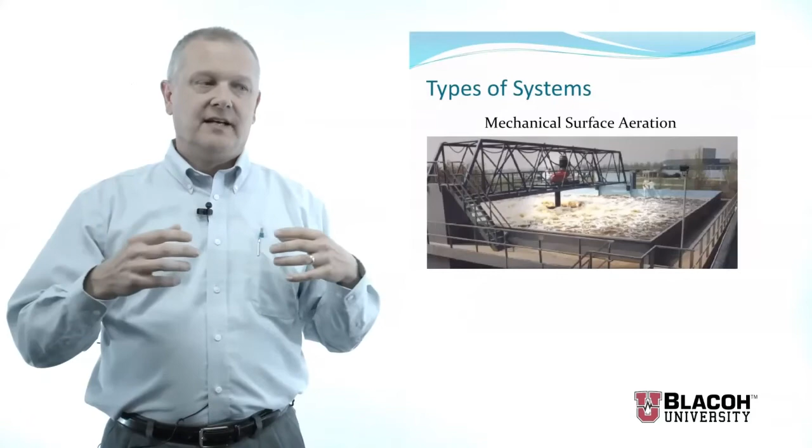This is actually not terribly common. Typically in rectangular tanks, we use the diffused air systems, and the mechanical aerators are saved for a type of design we call an oxidation ditch that I'll show you in just a minute.

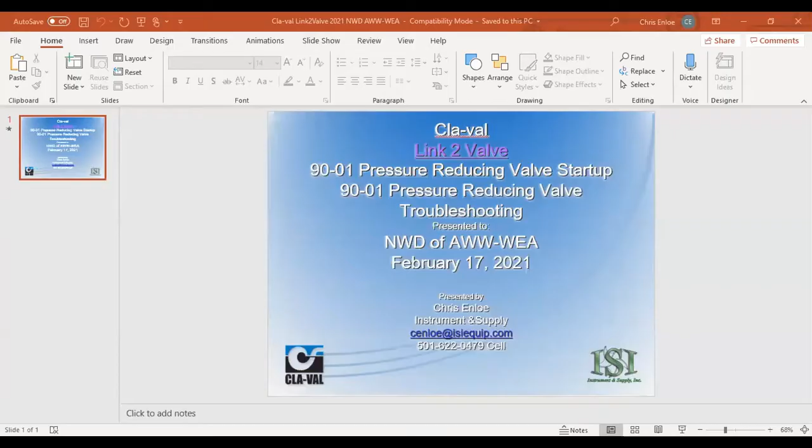All right, hopefully everybody can see that. Yes, I can, thanks. All right, very good.

We've been fielding several calls for Cla-Val pressure reducing valve startup and troubleshooting questions, and so I thought we would play a couple of videos from the Cla-Val website. Before we do that, I'd like to introduce those videos and talk a little bit about Link 2 Valve. Instrument and Supply has been a Cla-Val representative since 1982, going on 40 years here in another year or so. The investment that Cla-Val has put into maintenance and operator support has been tremendous over the last few years with the online resources, and Link 2 Valve is one of those resources.

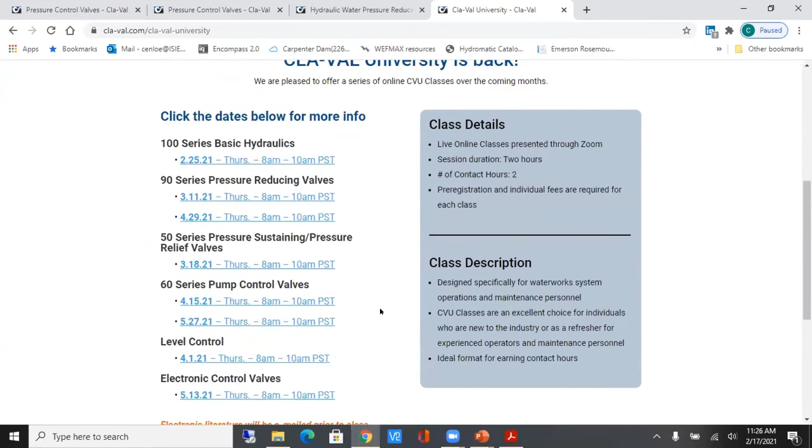So anyway, as you can see, there's quite a few things there that might be of interest to you. And you can certainly contact Instrument and Supply if you have any questions about that or want to get involved with any of those. We'd be happy to facilitate those.

So with that, I'm going to launch back into this other screen. Actually, I'm going to release the share, and I'll ask Zach to start that first video. It's the pressure reducing valve startup video, about 13 minutes long or so. When we finish that one, I'll field any questions that you might have. And if there's no questions, we'll launch into the troubleshooting video, which is about 10 to 12 minutes long or so. So I'll release the share, and Zach, if you would start the startup video.

In today's video, we're going to be discussing and providing you with a live demonstration on the startup of our 90 series pressure reducing valves. Let's get started.

So in this video, we're going to talk about a startup on our pressure reducing valve, our 90 series. A startup, or just bringing your valve online, the procedures to go through. So this here is our standard 90-01.

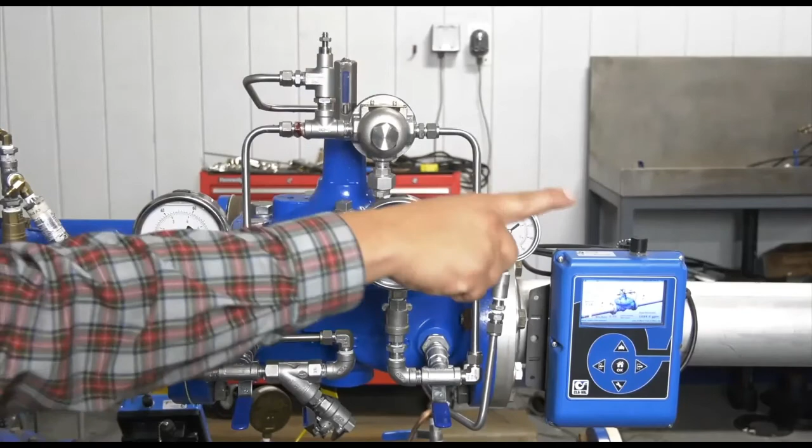So first we're going to need some pressure. Before we bring this online, just to note, our downstream gate valve is closed. We do have ball valves on this valve: number 1 is our inlet, number 2 is our cover, and number 3 is our outlet. What I like to do is start with this outlet ball valve closed, and again our downstream gate valve is closed as well.

So let's get some pressure going here. And you can see our pressure starting to build up.

There's our 60. Now the pressure you see on this downstream gauge is within our pilot system. This gauge here is our actual system pressure. You'll see this valve stayed closed on that initial startup, because we're keeping this number 3 ball valve closed, so we have 0 pressure in our system. This pressure is within our pilot system, and we have 60 PSI coming from our system side.

The first thing you want to do is make sure you bleed any air at your high points. Our high points are right here. We have an X101 installed on our valve, and our X101s have a little bleeder on the top. We'll loosen that up slightly till we get that little run of water, to get that air out.

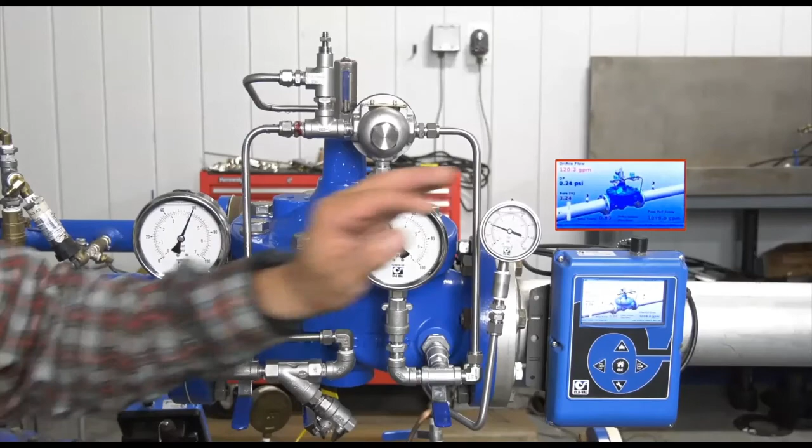But most importantly, you need some type of flow downstream. If you cannot open up that gate valve, this is why it's important that you have gauges as well, because if my pressure here is not moving, if this pressure matches what my inlet pressure is, then your gate valve, you're not flowing any water. So you got to make sure you're flowing something.

So now that we've got our flow, we're looking at about 120 GPM right now. The customer has requested to set this valve at 35 PSI. So what we're going to do is look at that IOM that I referenced earlier. You're going to see what your PSI per turn is.

Clockwise will always increase your CRD set point. Counterclockwise is going to decrease it. You always want to make your adjustments slow. So here we are, let's get to that 35 slowly.

If you initially do not see any change in your downstream pressure, let the system react. Give some time for the valve to react to the changes that you're making. You don't want to make your adjustments quick, and you don't want to make your adjustments too much, too far. Just make your adjustments slow and allow the system time to react.

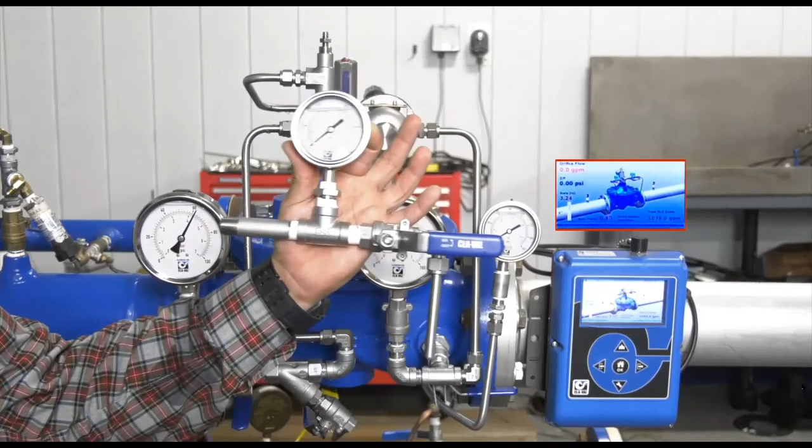Or as I mentioned earlier, you can use our X141 CRD tester, our X141TA. Our CRD has three connections. We have one inlet, there's only one inlet. This port here and this port here are both common.

So what we're going to do is go 3, close number 2, close number 1. By closing all those ball valves, we've isolated our pilot system. And now what we're going to do is remove this connection going into the CRD.

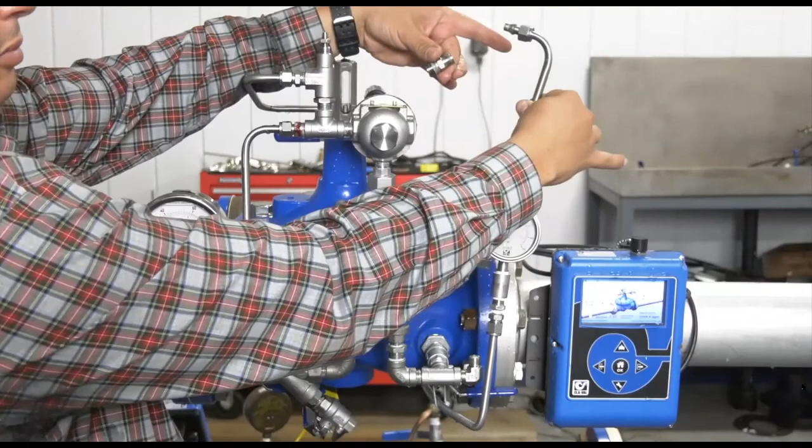Okay, so we've removed our connection to our CRD. Now we're going to take our CRD tester and thread it in there. All right, we're going to close the ball valve on our CRD tester. Now what we're going to do is open up, because we still have our inlet pressure.

Remember, we opened up that inlet gate valve earlier, so we still have our inlet pressure of 60 PSI. And now what we've done is we've brought that 60 PSI to the pilot itself. So what we're going to do is slightly open our ball valve on our CRD, just so we get a little bit of flow.

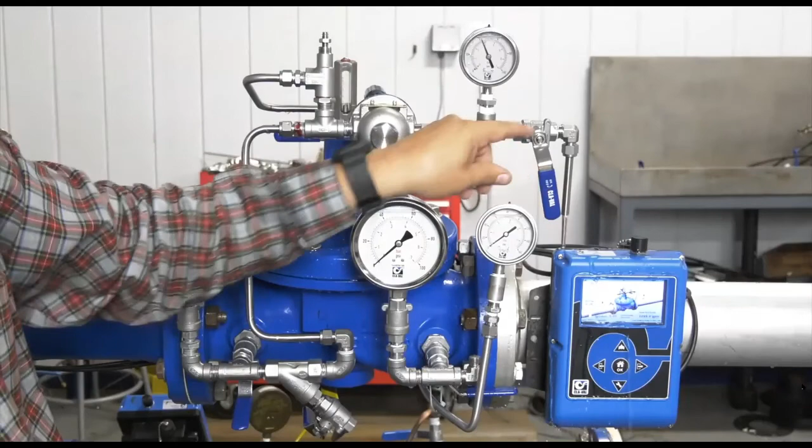So we get a little bit of flow here, and now when we make our adjustments to our CRD, you can see that change and that setting of the CRD. So you can see I've brought that up to about 50 there. There's our 40. Now if we want to get to our customer requested 35 PSI, we'll drop that down. There's our 35, and now our CRD is set.

So let's close our number 1.

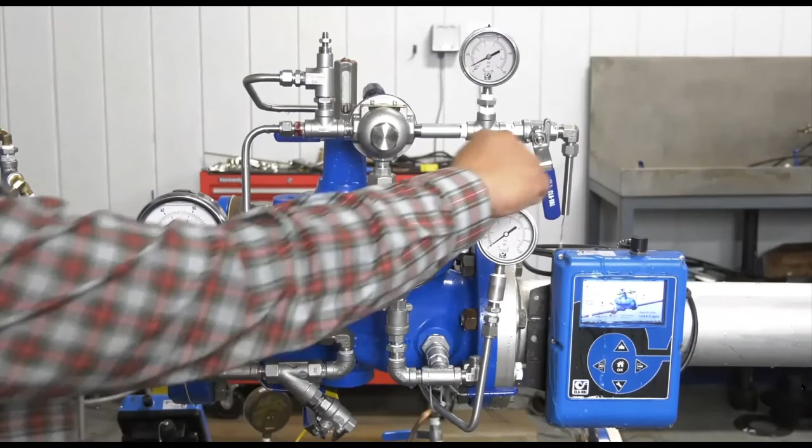And let's remove our test assembly. All right, so now we removed our X141 TA, our CRD tester. We got our tubing connection back on there.

Now it's important to know that when you set your CRD by using this tester, you're only seeing this little bit of pressure right here. So your CRD is going to need a slight difference in adjustment when you actually bring it online. But it's good to have this. It's nice to have this on there to get your CRD setting close to the setting that you want. It also verifies that the CRD is working.

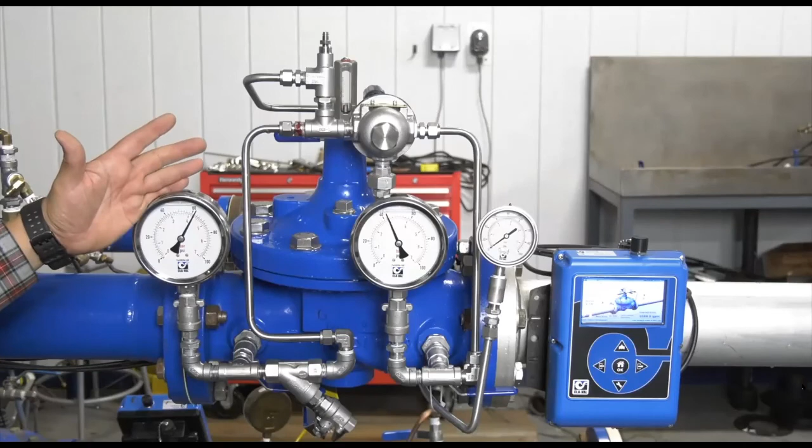So now all we need to do is actually bring that water pressure into the system. So what we'll do is we're going to open up number 1. Again, this brings water pressure onto the cover. We open up number 2. At this point, you would bleed your air out of all your high points. And then we're going to open up number 3, slowly filling that line. And now we'll slowly open our downstream gate valve and let some flow going through there.

Now we'll do a shutdown.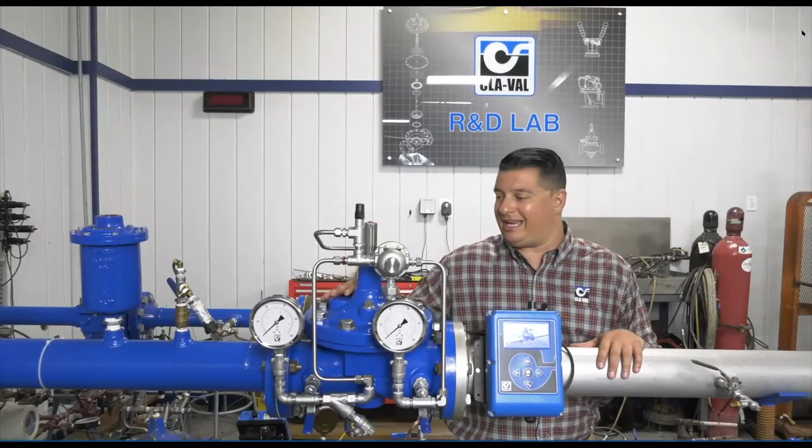Hello, my name is George Aguilar. I'm the training manager here at Cla-Val headquarters in Costa Mesa. In today's video, we're going to be discussing what to look for when troubleshooting our 90 series pressure reducing valves. Let's get started.

So in this video here, we're going to go over some troubleshooting tips and a couple of items to look for when troubleshooting. The first thing that you want to do is visit our website or contact your local Cla-Val rep and make sure that you get yourself one of these IOMs. These are available on our website as well, but the great thing about these IOMs is it gives you operation and startup procedures. You have maintenance tips, and you also have a chart right here of some of the things that you may want to go through when troubleshooting. You have a symptom, a probable cause, and a remedy. So it gives you a couple items to look through.

On the back side of this IOM, you get an exploded view of the main valve, a schematic of the 9001, the common components that you'll find in a pressure reducing valve or a 90 series, and most importantly, you have your CRD cutaway here that has your spring chart. So it's important information that you have for your CRD, so that way you know your adjustment ranges depending on what spring you have.

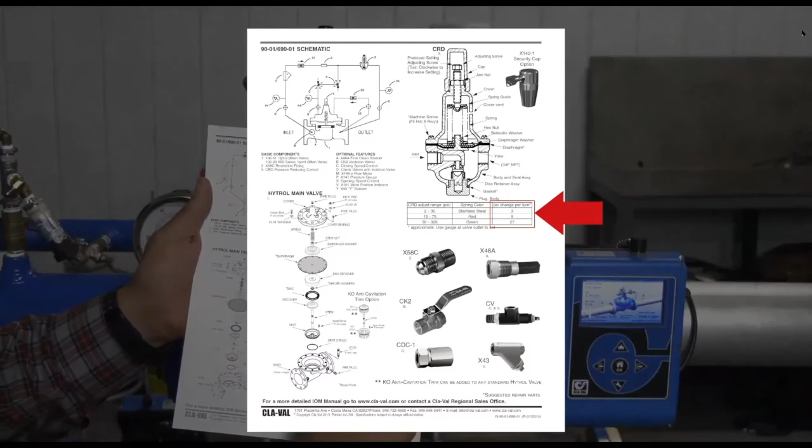So on the chart on the far right here, you have PSI change per turn. And that PSI per turn is based on which color spring you have inside of your CRD. So in this one here, I have a green spring. This is going to be a 30 to 300. That's the same one that we have installed on our valve.

So going through some of the symptoms or the probable causes that you may have with your 9001, we're just going to go down the list here with our IOM. If your valve has failed to open, meaning that you're not getting any water downstream and your downstream system pressure is getting really low, some of the things that you want to look for: number one, make sure you have sufficient pressure on your inlet. Hopefully you have gauges on your valve or within your vault so you can verify what those pressures are. First and foremost, you want to check that. You want to go through your main valve checks and make sure that your Hytrol is working properly.

If your valve hasn't been serviced for a while, if you have really aggressive water, if you had a main break—any of those things can cause the main valve not to work. The main valve may be stuck, it may not be able to open, and so on. For videos on troubleshooting your main valve, please visit our website.

Now, as far as verifying that the CRD is working, if you're not getting any pressure down into your system, the first thing you want to do is vary the adjustment on your CRD. Maybe someone made changes to it and it's set too low. So first we'll verify we have some pressure going here in our valve.

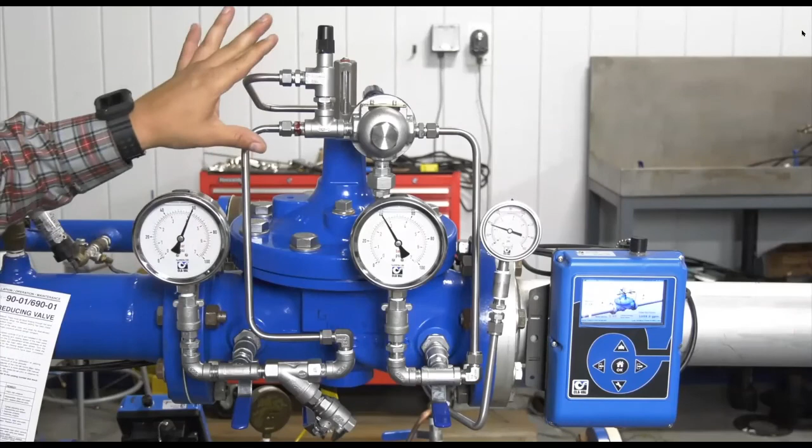The other item to look for, if your valve is not opening and you've already done those other three checks we've just discussed, is these speed controls that you find on here. They could be buried. Right now, this speed control looks like it's all the way out.

Let's show you what it looks like when it's all the way in. If you open up your speed control and see this, that speed control is buried—that needle inside there is absolutely buried. You want to make sure that when you're troubleshooting, or going through startup or anything, these speed controls are backed out completely. We'll back that out.

And we'll put that cover back on. And those are basically the items you're going to look for when trying to figure out why your valve is not opening.

Now, just the opposite—some items to look for when your valve is not closing. You want to verify, number one, that you're getting water pressure onto the cover of the valve. You have a couple of restrictions here. If we follow the inlet tubing from our supply pressure, one of the first things we come across is our strainers—either the Y strainer or the inline strainer.

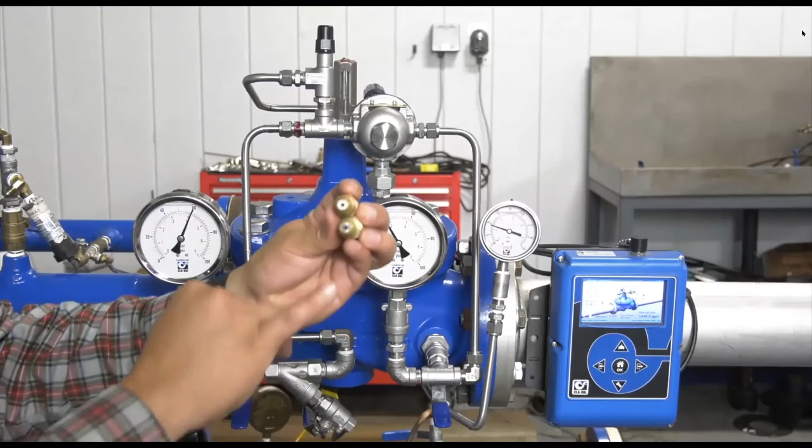Now this restriction fitting looks like this right here. You can see the restriction right inside there—our copper or brass fittings. This one is all stainless. We do have optional inserts depending on how aggressive your water is. But if you have really aggressive water or maybe higher pressures and are using our standard Delrin insert, you want to make sure that insert is actually inside there.

If that insert is clogged, for whatever reason, you're not going to get any water onto the cover, the valve won't close. And just the opposite, if this restriction fitting is blown out, then you would be putting too much water on the cover and you'd be flooding it. That would allow the valve to not open.

For operations on the restriction fitting, you'll have to see our operational video. But again, you have to have that restriction fitting in there. You want to verify that that restriction fitting is good and clean.

Also, when troubleshooting your valves, if you want to check your cover connections, make sure there's no buildup on your cover connections. If there's no water coming off the cover, or if this cover connection's clogged, you're not going to be able to get water on or off the cover. That can hinder the valve operation as well.

Now, to verify that the Hytrol works, you see that we have our ball valves. We have one on the inlet, I call this our number 1. We have one on the cover, I call this our number 2. And then we have a number 3 ball valve, which is on the outlet.

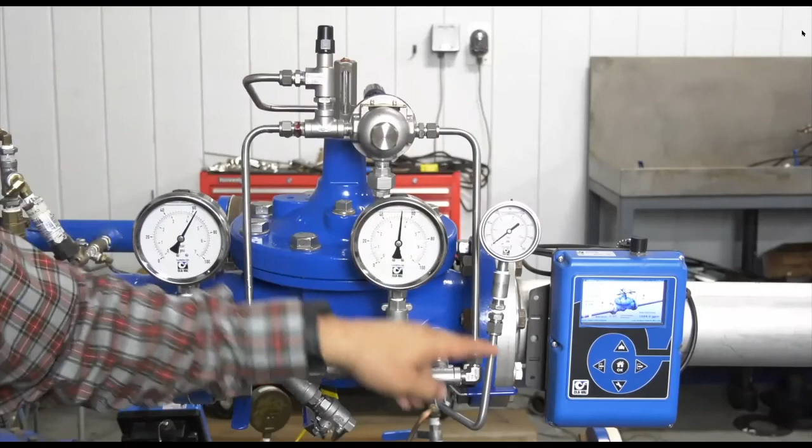But there's a simple shutdown sequence that you can do using these ball valves. So what I'll do is I'll shut number 3. By closing number 3, we follow our inlet. Water pressure has nowhere to go because this is closed. Water pressure backs up onto the cover, the valve closes.

At that point, we can close number 2, which locks the water pressure in the cover, keeping the valve closed or keeping the valve at its current position. And then we close number 1, which eliminates our water supply.

By having these ball valves, if we did find that our strainer was clogged, or if our restrictor fitting was blown out or clogged, if the CRD wasn't tracking like it was for us earlier, by isolating this pilot system, now I would be able to disconnect our tubing here, and you can see we have no water pressure. I can make any changes I need to the pilot system, and we're good to go.

We would be able to make any changes. Let's say if our CRD yoke or our disc is bad, maybe we had that main break, our strainers are clogged, we would be able to make those changes. So our shutdown sequence was 3, 2, 1.

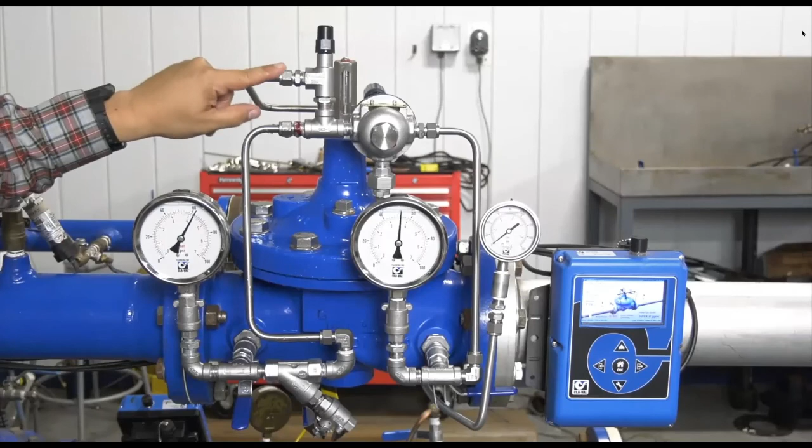Our startup sequence, we're going to open up number 1. You see our 60 PSI come in. We open up number 2. You want to make sure you always bleed the air out, so you're going to loosen up some of these fittings at your high points. If you have a position indicator or an X101, we have a bleeder on the top there. We'll loosen that up, get some of that air off the cover.

And then lastly, number 3, we'll open up number 3. Number 3 is always going to be slowly. And we're back running at 40.

It's important to remember as well, when you have gauges on your valve like this, this gauge is connected just before this ball valve here. So when we do close it, you'll see this trap pressure. This trap pressure is just within the pilot system here. You can see our gauge, this is our actual system gauge, that's down to 0. So this valve is closed. We're just having a little bit of trap pressure here.

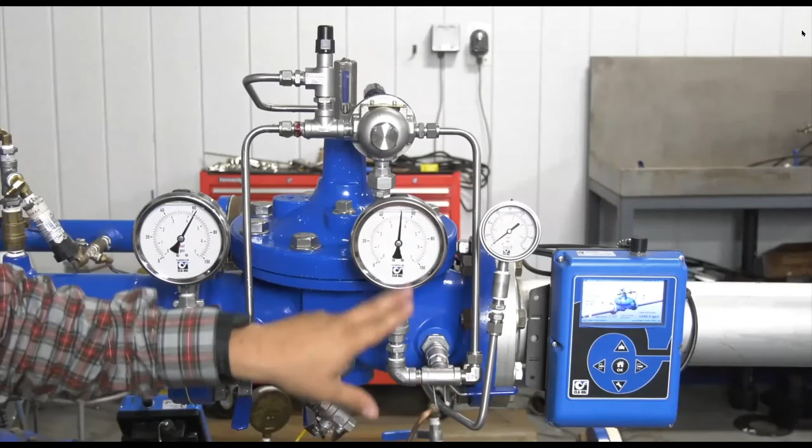So that will be it for our troubleshooting.

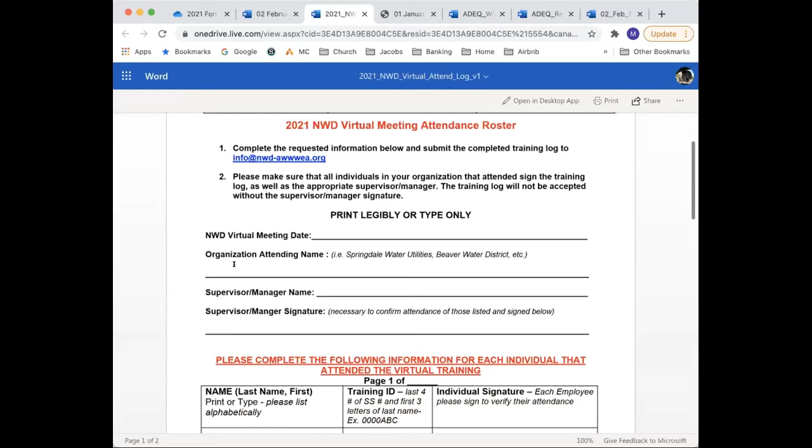So please, as much as we would have loved just to take the attendance directly from the Zoom attendance roster that's kind of logged for us, that doesn't give us all the information that we need to properly track your hours. So in the email that we sent out yesterday, there should be a form like this. So any of these virtual meetings that the Northwest District puts on, please fill this out for your organization. So Springdale Water, if you have a bunch of people from Springdale Water attending, list all their names, their training ID, and have the individuals sign it.

And once you get everybody that's attended, then please have the appropriate supervisor or manager give a final sign off and then email it up here to our district. And then we would get that on the spreadsheet and on our website as we've done in the past. We'll submit that to ADH as well, for paid members.

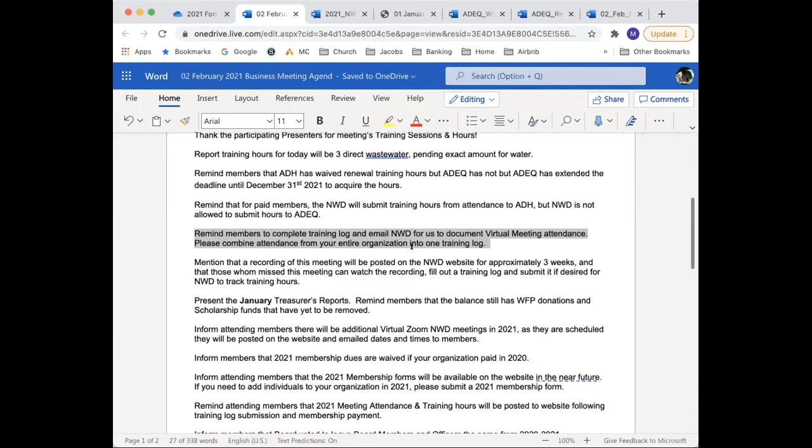Zach mentioned that this meeting's been recorded. We're going to try to post that on the district website for about 3 weeks. Give us a couple days to get it posted, so that people who couldn't be here today, with everything going on, schedules, weather related issues, can still have access to the training. ADEQ said it's permissible for people to watch the recording and fill out the training log if you'd like us to track it with everything else.

Financially, hope I'm not going too quick, trying not to drag this out. Just letting you know how the district stands. This is the treasurer's report for the Northwest District for the January report, covering through half of December. You can see we started in October with a balance of $26,128.40.

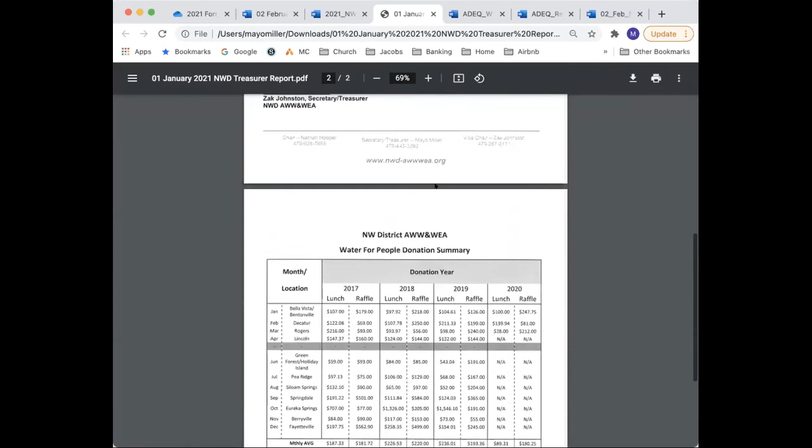On November 10th we had $25,650.06 still in the Northwest District account. Keep in mind that's a pretty decent amount, but that does not include roughly $5,500 of Water for People donations we still need to release to Water for People. We're awaiting instructions from the state AWWA on how they prefer us to do that. There's also a couple thousand dollars for scholarships not reflected that will come out of this number.

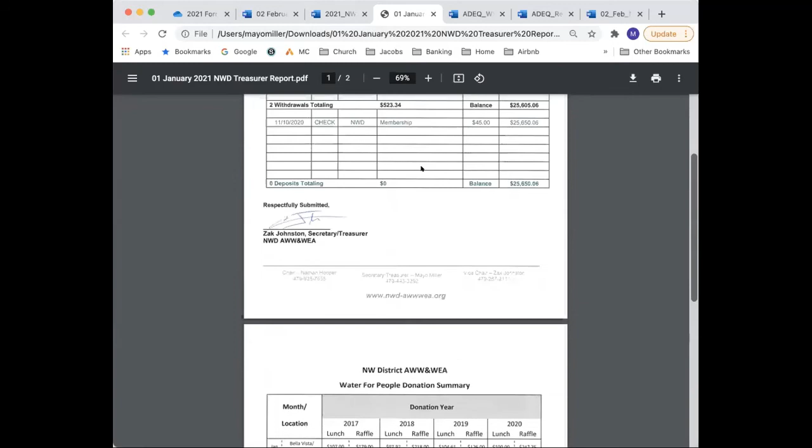I don't know how this might be possible, but I think formally and technically I'm supposed to have a motion and a second to approve this treasurer's report as presented. If there are any objections, just put that in the chat as well. We may have to get creative on how we make that work.

Let's see here, what else? Oh, hold on, we got a motion to approve, and we got a second in the chat. Great, any objections? Okay, if there are some objections we can address those. I've got a second from Ashley Gregg. Great, thanks.

All right, we'll keep moving here, almost wrapped up, and we'll hang on for a little bit after in case anybody has other questions. We're going to have additional meetings throughout the year. We don't know those dates right now, but we'll email everybody and post that on the website as we get those scheduled.

Also, in the email from yesterday, just a reminder that if you paid your Northwest District membership dues in 2020, we are waiving those dues for 2021. If you didn't pay last year and wish for us to track and submit any of your hours, we will probably have a membership form ready by next week and put it on the website so you can submit that and get you in good standing.

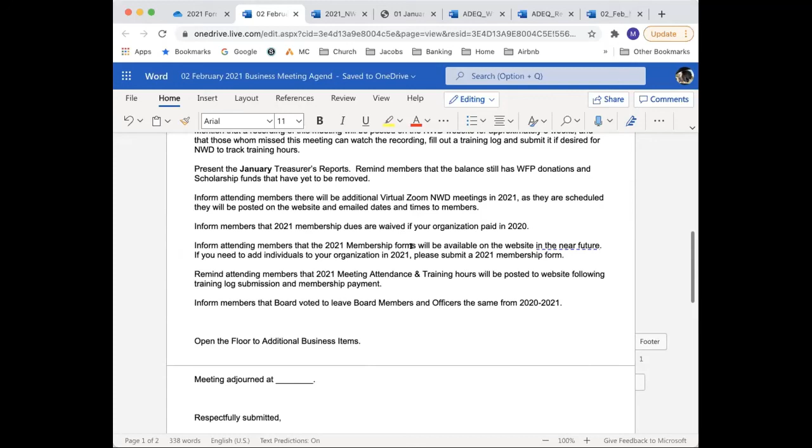Does anybody have anything else we need to address or any questions? I motion Mayo Miller, permanent president forever. Denied, absolutely denied.